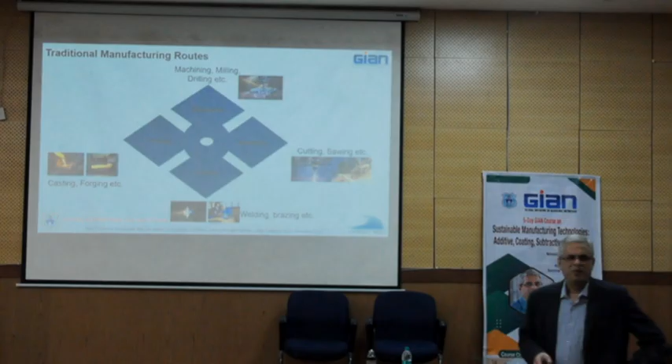Separating it from a larger body like cutting, sawing, there's casting and forging, welding, brazing. All of these are important. Yeah, I want to make that point. It's not as though now AM will start and all of these will go for a toss. No. So, but these are traditional techniques. They will be there always. AM seeks to replace some of them, some of the times, right? That's important.

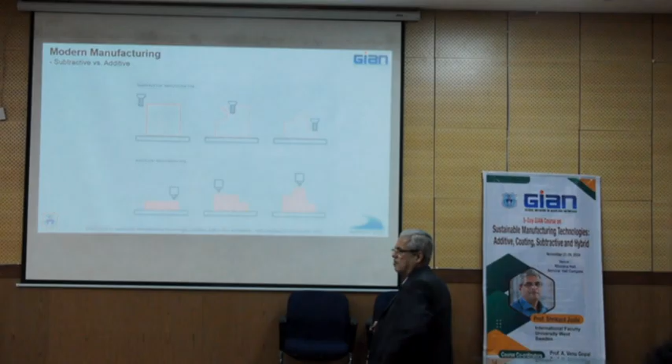I don't think we need to go into this. All the subtractive techniques, for example, are top down. You start with a huge chunk of material, and then from that you machine out in an elegant way as well as you can the kind of part that you want, right? Additive, on the other hand, everything you have heard of, layer by layer, bottom up, right? So you kind of use what you need. You don't create junk alongside that. Simple way of doing that, right?

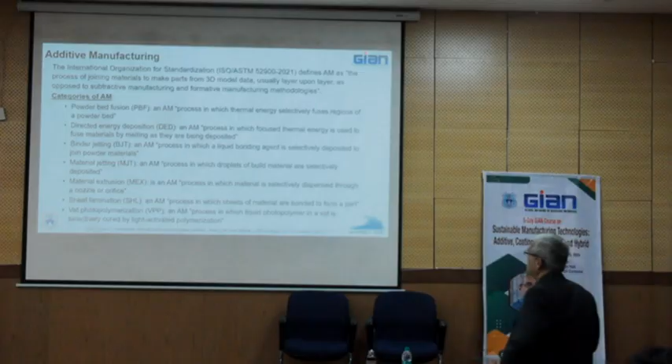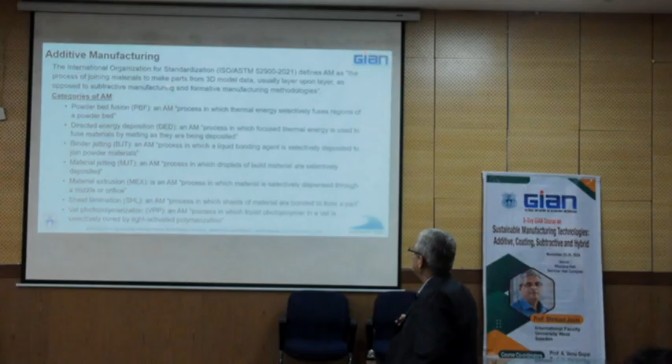Let's see. I always like to see the definition. How do people define AM, right? So if you look at the International Organization for Standardization, they define AM as follows: the process of joining materials to make parts from 3D model data, usually layer by layer, as opposed to subtractive manufacturing and other formative manufacturing technologies. You have many categories of AM today.

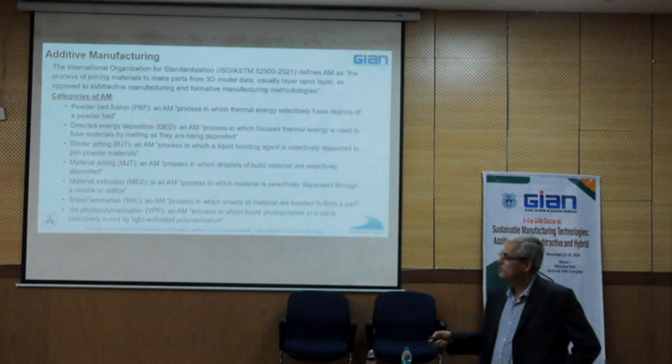If you start Googling, you'll see all sorts of stuff come up, which somehow fulfills at least some parts of this definition, right? Powder bed fusion, all of us tend to accept that. Directed energy deposition, and I intentionally sequenced it in this manner. Binder jetting, material jetting, little less used. Material extrusion. Honestly, I didn't know that this is classified as AM. I didn't know that, but apparently it is.

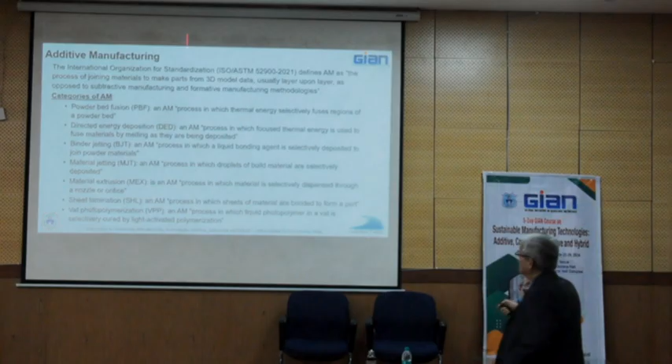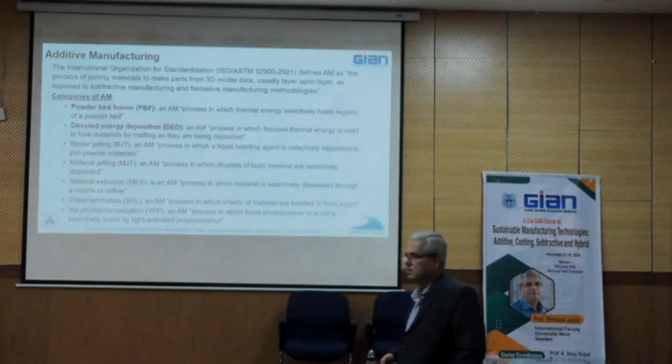Sheet lamination, what the hell? You stack these sheets together layer by layer, so it is AM. No, I don't agree, but I must tell you what is out there, right? Vat photopolymerization, this goes into a regime which I said I will of course not cover. But be that as it may, for me, what is relevant the most from a metal additive manufacturing standpoint are these two: powder bed fusion and directed energy deposition. So we will spend most of our time talking about these two. And if something else is interesting for whatever reason, we will take it over lunch, tea, or at the guest house.

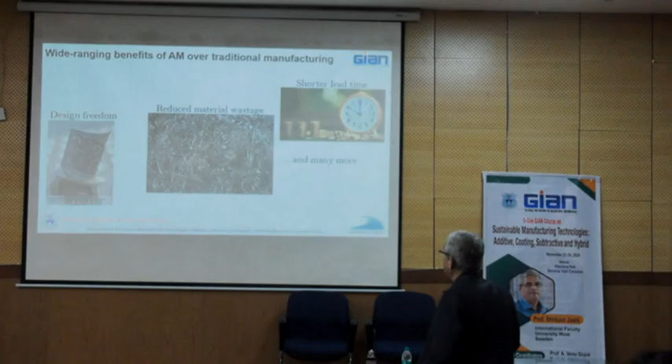Guys who are wedded to AM always like to talk about this: wide-ranging benefits over traditional manufacturing, design freedom, reduced material wastage, shorter lead time. The reason I decided to pick these three and not go through a long list about sustainability, this and that, is because I believe in these three. Whether it is sustainable or not is a different issue, but these three are always true. There is no ambiguity that if you do something by AM, it gives you immense design freedom, which therefore leads to lightweighting and things like that. There's no two ways about that.

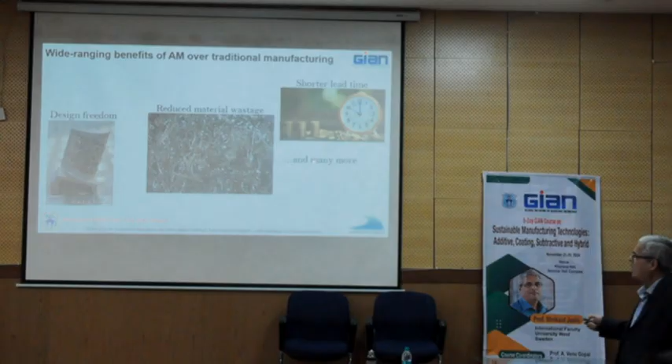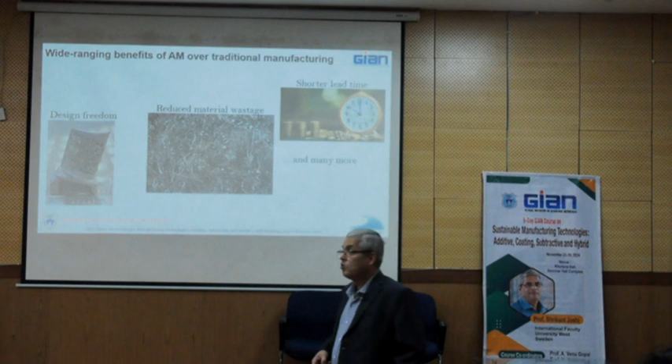If you do something bottom up rather than top down, via machining, drilling, all that stuff, you don't produce this kind of wastage or scrap, right? No confusion about that either. And therefore it leads to shorter time. And any of the advantages that are directly related to these three, I agree with. I will stay away from sustainability because I relate that to design specificity. But otherwise, if you say, okay, I can print just in time, of course. I can make patient-specific implants, right?

I have a Swedish colleague who is 7 feet, and I have a friend from my BTech days who's struggling to reach 5 feet. They want different hip joints or dental implants. You can make patient-specific implants, right? All of those benefits are pretty clear. So no point in arguing about that, right?

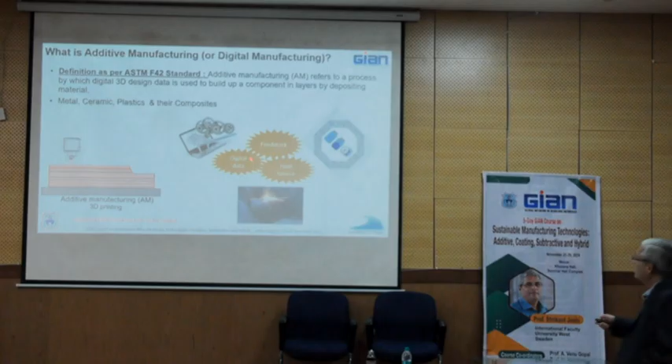You use all the tools at your disposal to make it happen, right? So you have design data. This is something going on the side, but you rely on digital data. You rely on good quality feedstock, and you rely on an appropriate heat source to make metal AM happen, right? Now, we will at different points of time talk about all of these three during the course of this talk. Feedstock will be part of a different lecture perhaps, but you harness the benefits from all of these three to be able to do crazy stuff like that, in a very convenient way.

In terms of size and complexity, what can you do, what can you not do? I think that is controlled partly by your imagination and partly by your designing skills. That is what limits it. Otherwise, you can do just about anything.

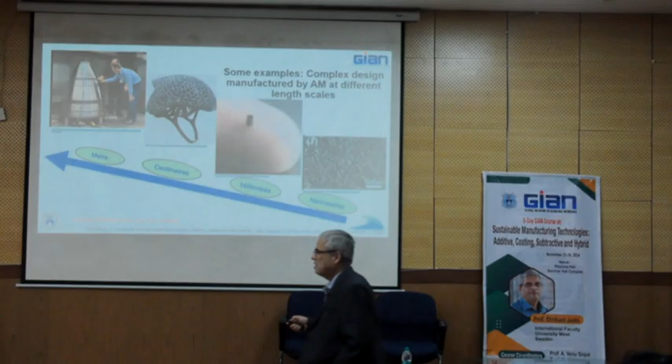This is something that NASA does, but right in the same building where I have my office, GKN Aerospace makes similar looking parts which are taller than this guy, by DED wire, right there, and they fly.

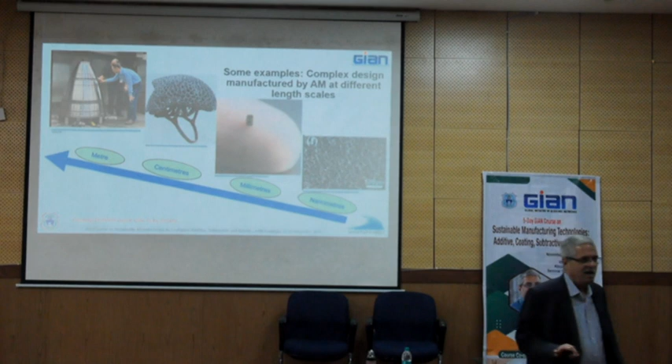So just like some people may try to sell you that if you use AM, you're sustainable. That's wrong. There are other guys who will tell you that AM is all hype, not reality. Even that is not reality. And as educated people, our job is to filter what this group is saying, filter what that group is saying, and zero in on reality.

So the reality is somewhere in between. Yes, usually it is sustainable. It's not hype, it's real. But in some cases, it may be meaningless to look at AM as an alternative production route. And it is also important to note that all of these are realizable using appropriate tools. So you can do many fun things at different length scales.

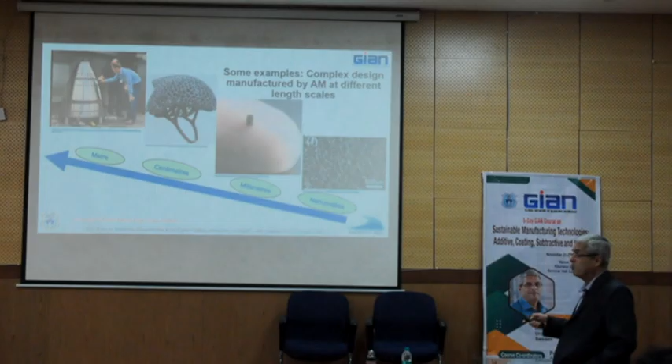That's important, because I've heard people say AM is okay only for small parts. Small parts because you're looking at PBF. Maybe you have a 9-inch by 9-inch or 6-inch by 6-inch build volume and say, okay, we will do only small parts. No, these are real, they fly, so no problem.

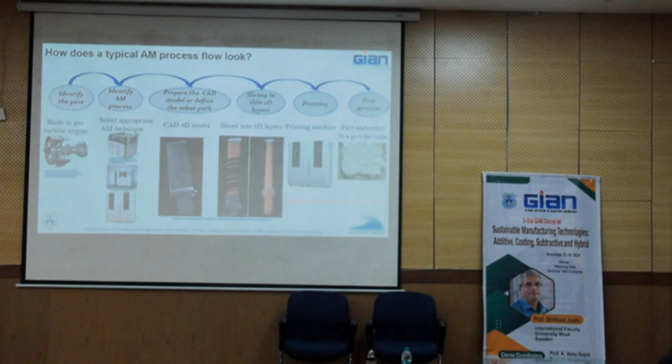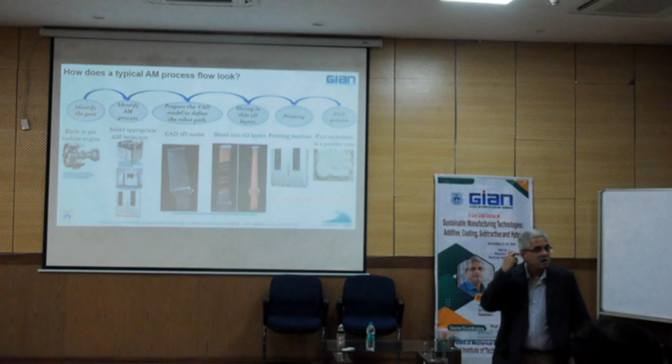So what does a typical AM process flow look like? I'm being a little generic here, but identify the part, and decide if that part is appropriate to be AM built, first of all. If it is appropriate, you identify the AM process. It could be one of several that we will talk about. Prepare a CAD file for that, do layer by layer slicing so that you know how to print, then actually print and post-process.

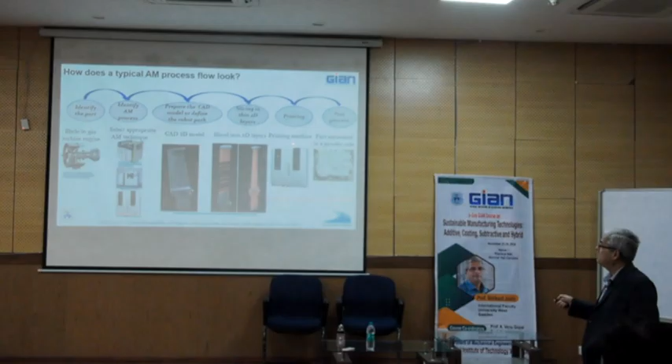So we are going to talk about several aspects of this in different modules of this course. Incidentally, I took some of these slides from my postdoc, Ashish, very smart guy. He's in Finland right now. So we'll talk about most of these things. At the moment, this module and the next one, we will focus more on the printing part.

So what concepts do you need to know to exploit AM? You need to know about the raw material. What quality of powders do you need to use? What quality of wire do you need to use? In some cases, it could be liquid, but we will not talk about that. But powders and wires especially.

You need to better understand how melting and solidification takes place. In some cases, and we are not going to talk about that either, you want to see if you can take some signals during melting and solidification, learn from those signals and do some sort of a feedback loop to be able to control how you print. That is crucial. Sometimes, depending upon the application, you want some mechanical post-treatment.

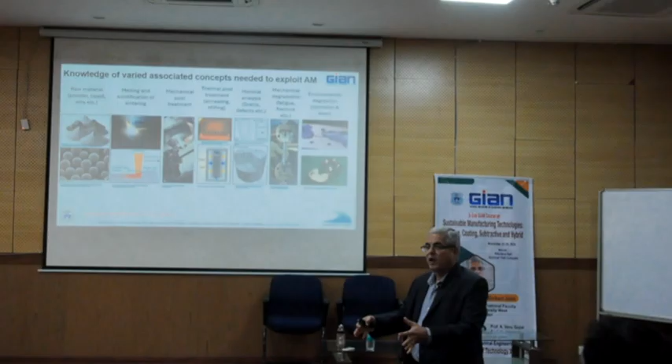I'm going to differentiate this a little bit from post-treatment that is inevitable to make the part, depending upon what process you use, but something that you need once the part is out to actually deploy it in real use. So it could be mechanical in some cases. In some cases, it could be thermal. And we will talk a lot about this part.

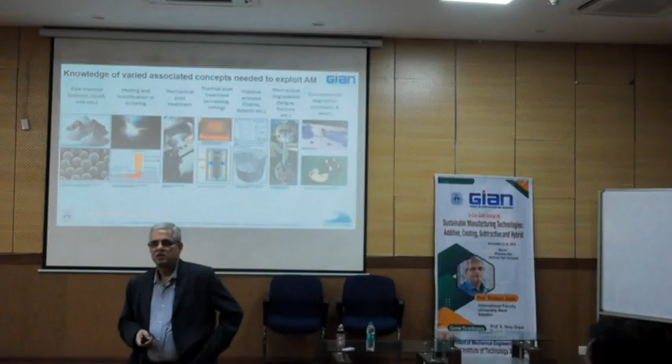You also need to understand characterization of these parts. I don't know how many of you come from a metallurgy background. How many of you have seen the structure of an AM part? If you can raise your hands. Have any of you had a chance to see the structure of an AM part? You two, but that's rare. Anyone else? Three? Yeah, but very few. Most of you others have not.

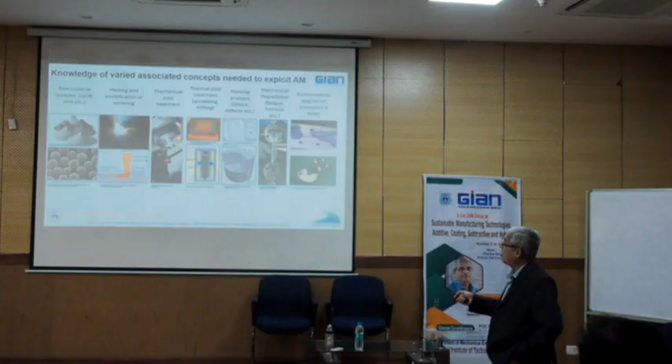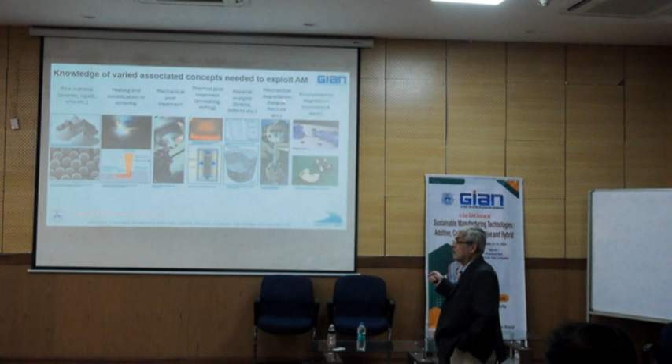So it's important for you to be aware of how the process or the process parameters you adopt influence the structure of the built part. For some of you, it may just be curiosity. For others, it may be very important because, believe it or not, this eventually reflects what mechanical properties the part will have. I see Dr. Manjaya nodding, so probably he does a lot of that in his research.

And then after all this, you need to see whether what you have built can sustain a real application for a long time. If it cannot, does it need to be surface engineered in some manner? So if you want to fully exploit AM, you need to have a fairly decent understanding of all of these things.

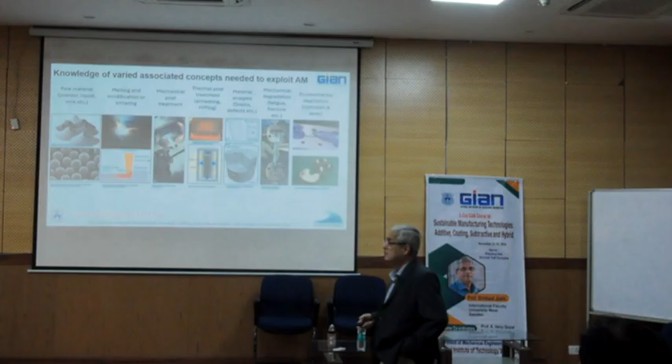Sometimes you may not, but someone else in your team might have, or you may collaborate, but the important thing is all these things are crucial, right? And I spoke about structure, the metallic structure of this. That was just one example. Someone like Dr. Manjaya is necessary with good background in materials engineering. I think the 2-3 hands that went up also are in some way associated with materials engineering.

So different parts of this cycle require different kinds of expertise, right? Data science, design, robotics and automation. You need knowledge of all of these, right? Does anyone want to argue about this, that it is interdisciplinary or whatever?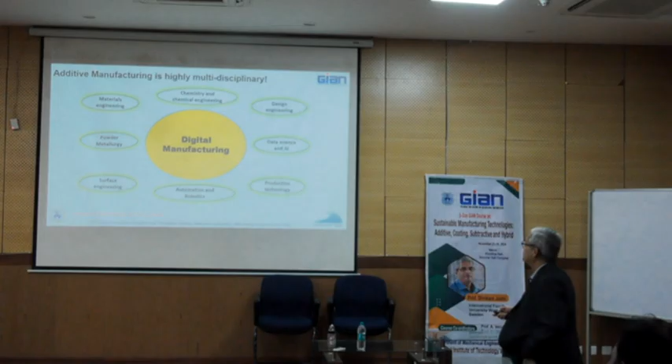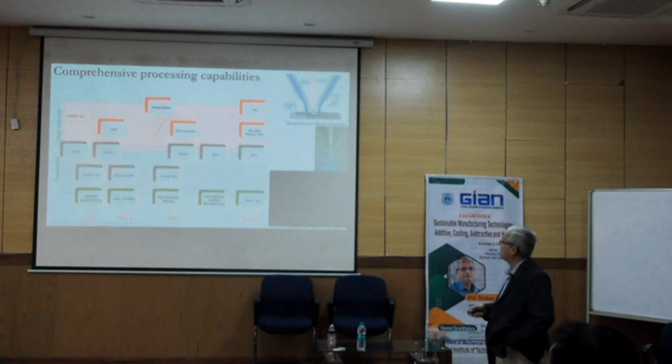Let's look a little bit at what the canvas of additive manufacturing technologies looks like, right? So there are essentially 2 broad categories, one associated with energy beams. One could be laser, one could be electron beam. The other, of course, is arc. People used to call it a poor cousin of the energy beam technologies, but I don't think so.

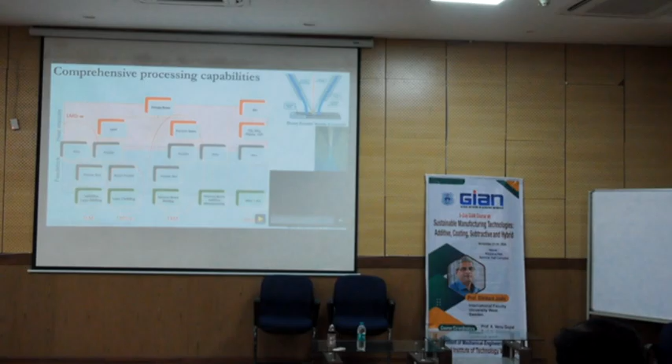Fairly proficient in, let me see if I can, this is incidentally what I'm showing you here is everything that we have in... did it start or did... but doesn't matter, it's not important.

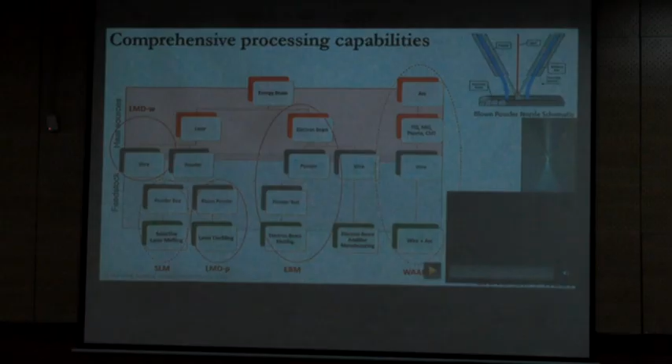Yeah, but what I wanted to show while that video is going on the side is we at our university have access to all of these things that I encircle here, right? We have an electron beam equipment from GE Additive. Earlier it used to be known as Arcam. It still remains one of the very few companies that makes electron beam powder bed fusion equipment. We recently have procured a powder bed laser equipment from Aconity. It has a fairly good size build volume.

We have also been working for the longest time, even before it was fashionable to call it additive manufacturing, for almost 20 years now, with direct energy deposition using wire. And this big part that I have mentioned, made by GKN Aerospace, is an outcome of some of the low TRL work that we did with direct energy deposition using wire. So we touch all of these bases.

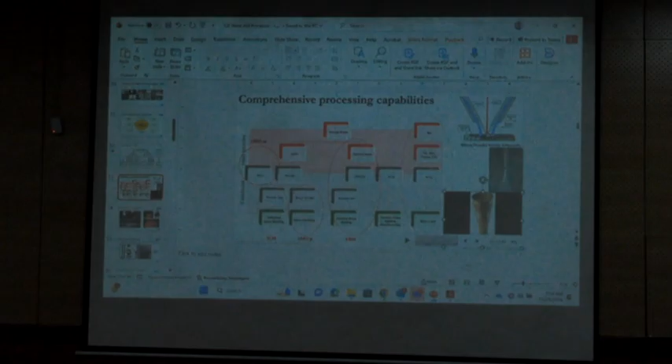More recently, we have been beginning to pay more and more attention to WAAM also. It's not as useless as people want you to believe. It's cheap, but it's very useful. And we have begun to use it to make, at least in a preliminary way, many gas turbine parts and things like that.

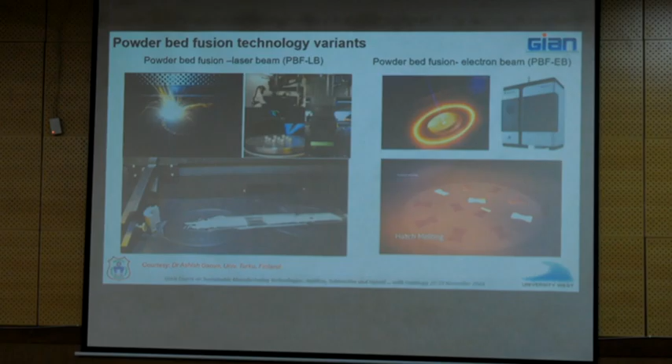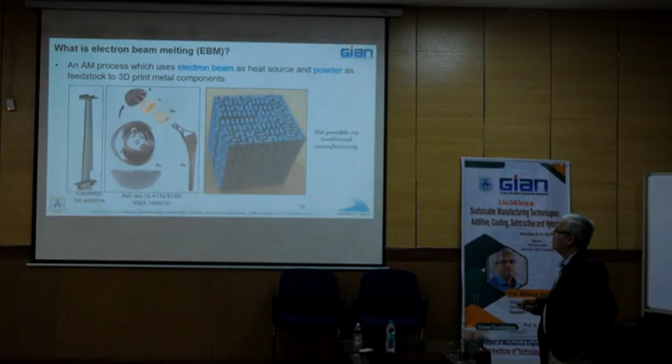Have any of you seen an EBM machine anytime, anywhere? There are very few in India. There are more SLM machines, I think, in India than EBM machines. I will try and run you through how this works a little bit. So if you look at an electron beam machine, as the name suggests, it uses an electron beam as an energy source, right? And powder as feedstock in most cases, to 3D print any metal component.

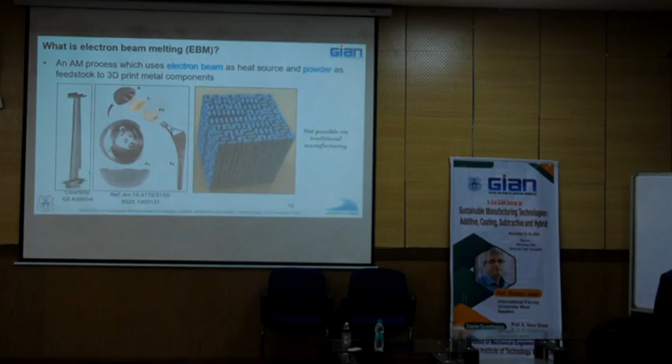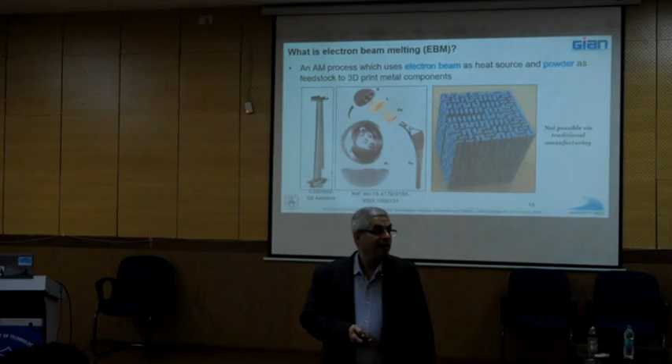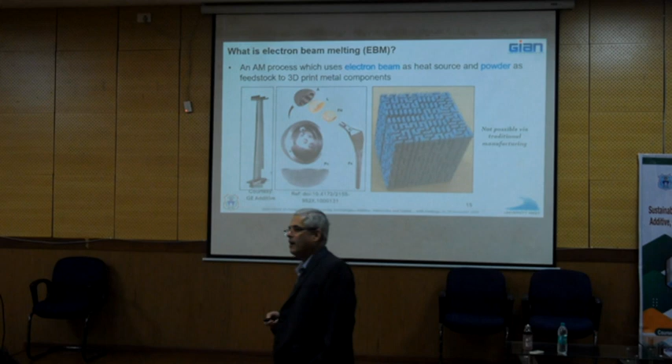So, next step, that's correct. So you use the powder, you make it in the form of a bed, and you use the electron beam to locally fuse in regions of interest. Those regions of interest being dictated by what your 2D slice looks like, right? So that's simple. So let's talk about some of the hardware issues.

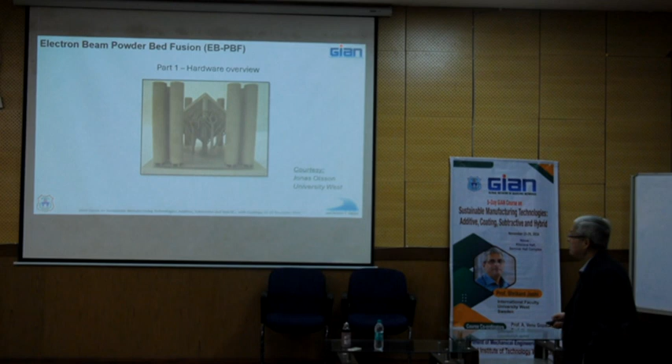I actually had a full video of the Arcam equipment we have, but I couldn't accommodate it. So this is what it looks like. It's somewhat a lab type equipment for EBM. It has two essential parts. It has this electron beam column, just like you would have in an SEM, for example, if you have seen a scanning electron microscope, in a very loose sense, something like that.

You have a processing chamber which has twin powder hoppers where you feed the powder that you will utilize to make the component. The hardware has several other crucial components.

It has a rake. What's a rake? It will take the powder from the hopper and form a bed with that. It will spread the powder. So that's a rake, right?

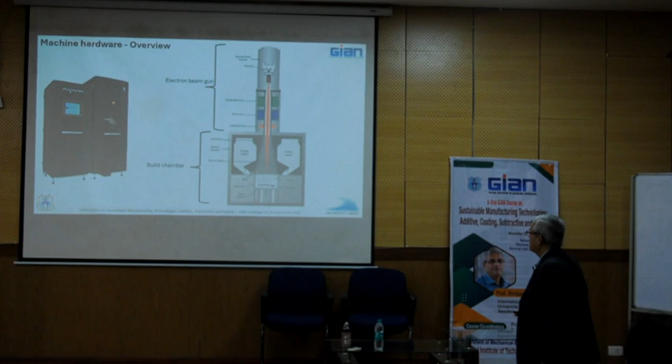And then the electron beam will locally fuse the powder, and the rest of the powder will remain unsintered, not go away. Then at this stage, you start with what is called a build plate.

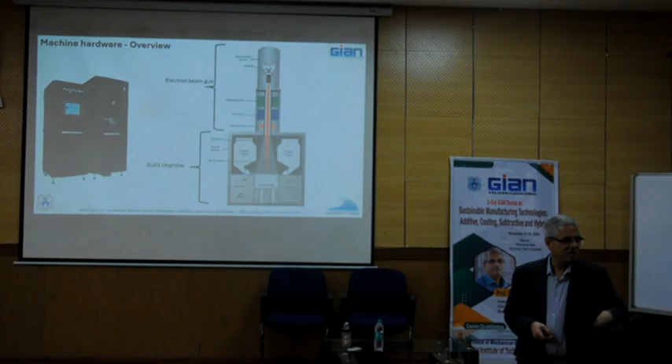This will advance depending upon what your layer thickness is. Again, a new bed of powder will be raked, and again you will locally fuse it. Now what you fuse would be a little bit different compared to the earlier layer, because again it will be governed by the slice data. That's how it proceeds until you have built the part that you have designed to build.

So, just what I said: a thin layer of powder distributed and welded, every layer. Part size is limited, as I was saying, to whatever your equipment allows you to handle. You can't build the kind of cone that I showed right now in such a chamber.

Eventually, whenever you stop, the whole build volume will be filled with powder, with the component kind of embedded inside, where it was sintered, or fused, by the beam.

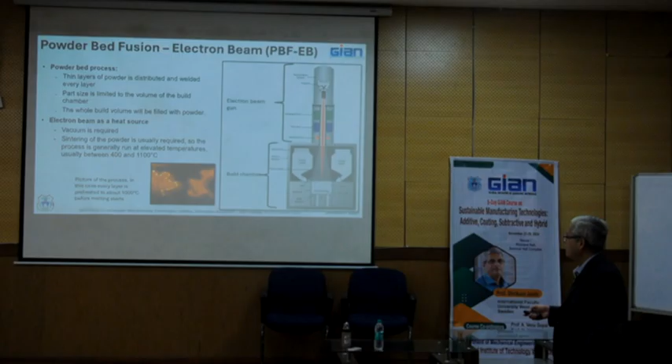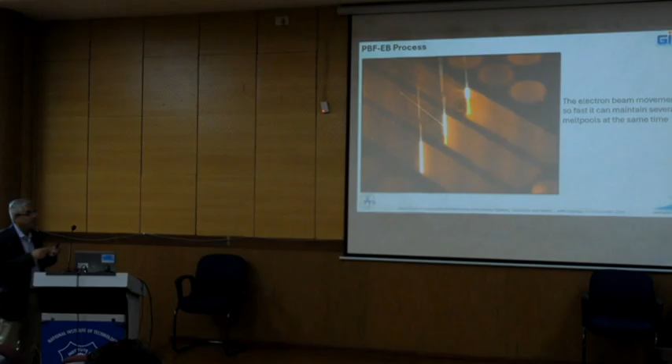I have some videos, I don't think they do justice to what actually happens, but it's a very interesting process to look at. One nice thing is the electron beam moves so quickly that you can simultaneously maintain several melt pools at a given time. If you don't believe me, I hope there is some video that will show you that. It's so quick that there is something molten here, here, here at the same time, because it moves so quickly. That is extremely fascinating.

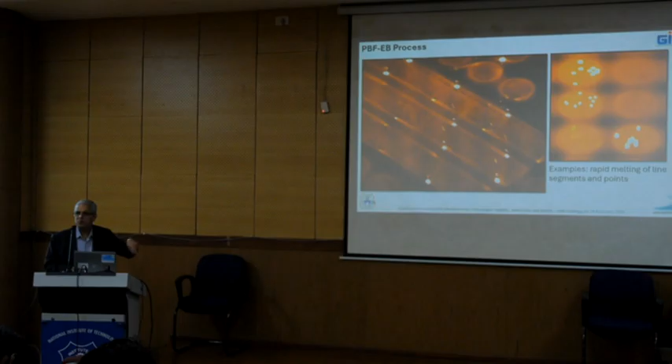Here is an example where you have a rapidly melting line at different segments at a given time. That works very well. And how do you move this point? That determines structure. On the face of it, it's very simple, but at another level it needs significant knowledge of what will happen depending upon how you jump these little beams around.

Eventually, once the process is done, the sintered powder with the build parts will look something like this. Looks like crap actually, it looks very bad. But once you take the unsintered powder out, once you have removed that, then you have whatever you want.

This may look like a very unimaginative build, not terribly exciting, but as an academic, this is very exciting. Why is it exciting to do something like this? For various reasons — we are trying to build here blocks.

So we are looking at different build strategies. This may be built with the electron beam dancing around in a certain way, this could be built with it dancing around in some other way. The size is such that we can, for example, do tensile test specimens, or fatigue, or creep. We can fabricate them in this direction, or we can fabricate them in this direction.

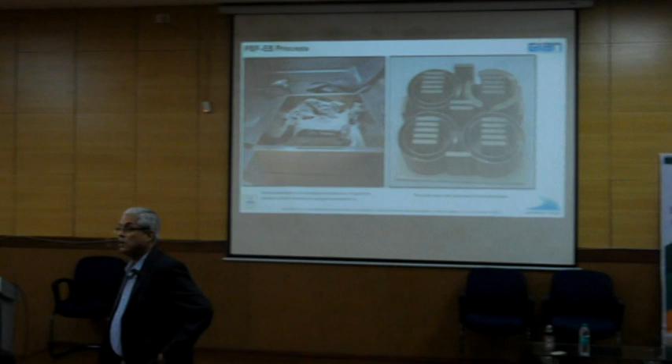Strength. Yeah, I'll make tensile specimens to measure tensile strength, but that's not the answer I'm looking for.

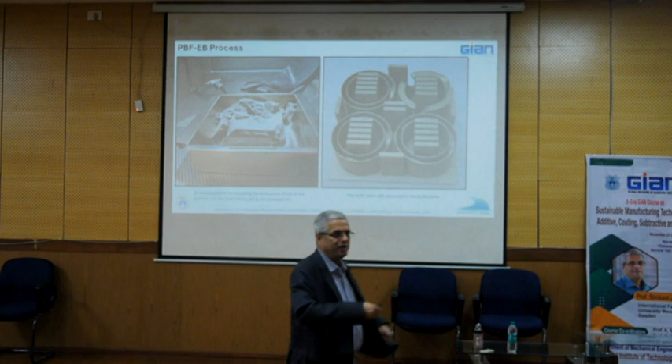Loaded direction, correct — so go one step further, then you get 100 out of 100. Anisotropy, correct. I'm interested in seeing if the mechanical properties are the same in the build direction and the direction transverse to it, because many of these, at least reportedly, tend to be very anisotropic in properties.

And then I also want to look at what happens if my wall thickness is thin or thick. So this kind of build allows me to do many things — this is what we call a bread and butter build. If you make one build like that, it's one PhD and a little bit of a postdoc. One build like that keeps us busy for a long, long time.

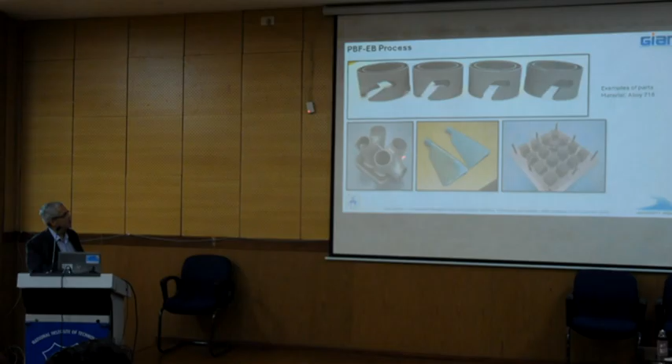And then, of course, it need not be like this. It could be more complex, and you can build just about anything. So that's important.

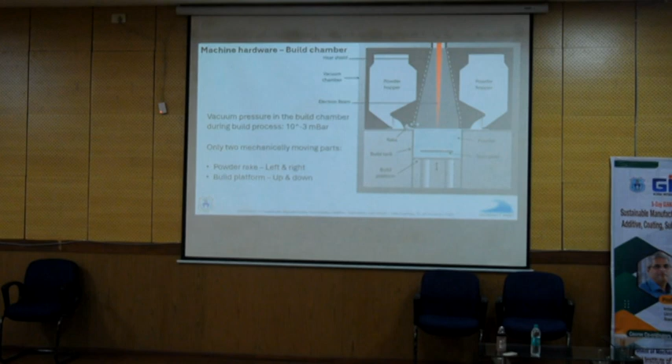Let's look at some other things. There's a heat shield here for preheating. This is done under vacuum, roughly 10 to the minus 3 millibar level. The nice thing is there are only two moving parts: one is the rake that sweeps the powder, the other is the bottom platform that goes up and down, mostly up, depending upon what layer thickness you have.

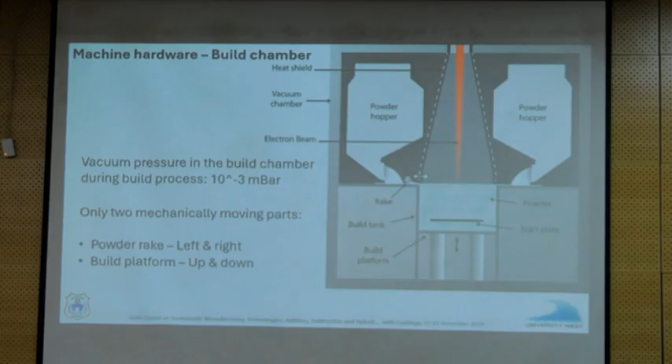The purpose of the rake is to apply a thin powder layer. That is a process variable - how thin do I make it? 30 microns, 50 microns, 60 microns? That's something I can vary, and it's one of the process variables people usually investigate. Your Z direction up and down motion will be dictated by what powder layer thickness you choose to employ during your build.

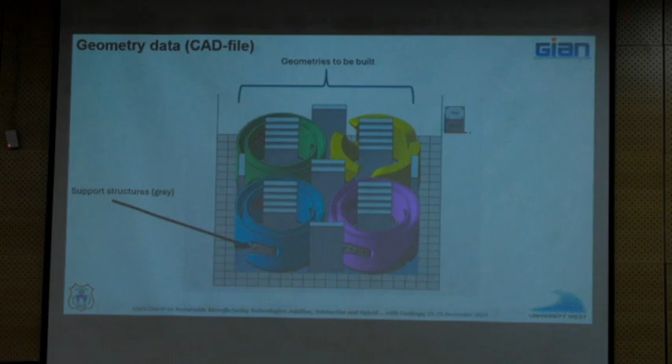Let's talk a little bit about the process, and hopefully there are some videos that fascinate you. You always have a support structure on which you start building, and eventually you need to take it off - remove the support structure. Your geometries could be as complex as possible; there is usually no constraint, but they have to be within the build plate that your chamber can accommodate. That's the main thing really.

The typical layer thickness that we have used in most of our work has been between 50 to 90 microns. Sometimes that is also dictated by your powder particle size, but that's a complicated interrelationship. We have kind of changed it over this interval, and that works quite well.

If you have to define the steps involved in processing: it starts in powder bed fusion with application of a layer by a rake with whatever thickness you choose. Then you use an appropriate power for your electron beam - something that can be varied about 3 kilowatts at fairly large speed. We can vary the spot size as well. There is a certain focus spot size for the electron beam, but you can defocus if you choose to build it with the gun a bit further away from the focal distance - then you get a defocus spot. Sometimes you may want to do that for certain applications, and then you program it to scan. The scan strategy is important in how you make the beam jump.

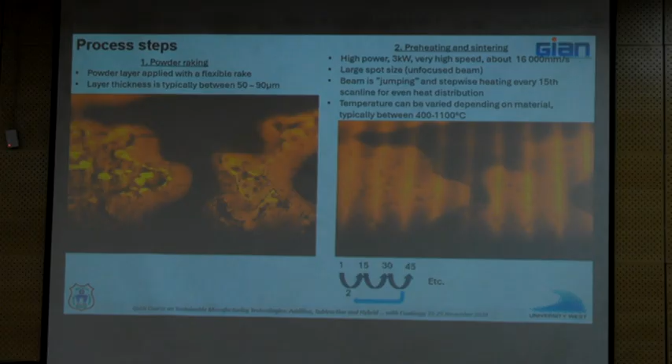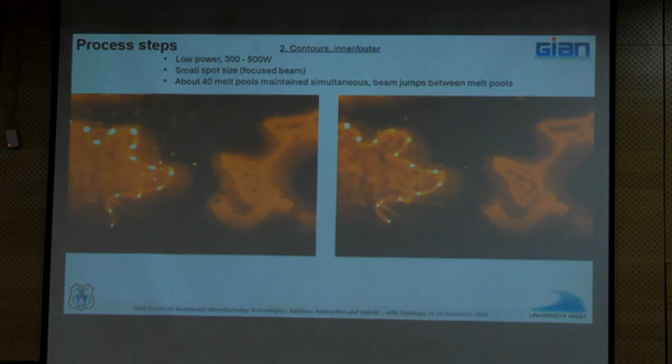Depending upon what material you are depositing, you govern the temperature as well. Our experience with our equipment has been that you can maintain up to 40 melt pools at a given time - the beam is jumping, but what is melted is not yet fully solidified. That's what it means. It doesn't mean 40 beams, it is 40 live melt pools, which gives you some indication of how fast the thing can move.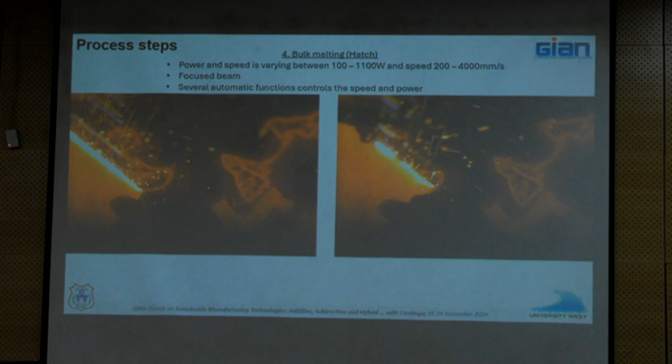These are basically research interests - what is the influence of power, what is the influence of scan speed, do we do it in focus or non-focus - but just talking here about the capability of the beam.

Now Dr. Manje has shown me the trick of how to make my videos work. So this is powder raking now.

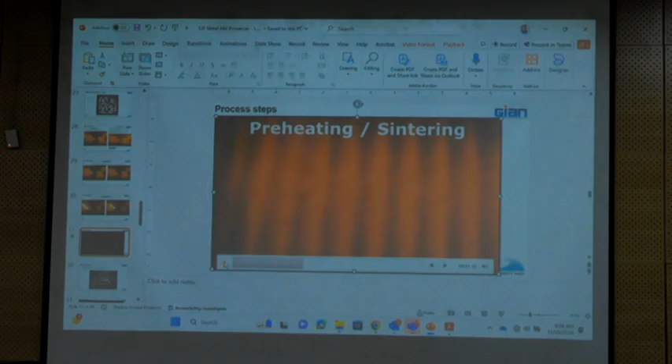Then a little bit of preheating and sintering using a laser beam, and then we do a contour. We'll stop there and see if you understand what contour means. So we preheat to sinter the powder, then we do contour melting, and then we do hatch melting after that - very fascinating to see.

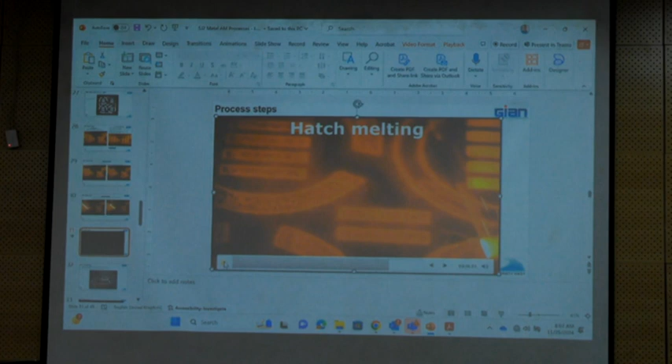So many electron beam spots - this is still all contour melting, and then we do hatch melting, right, so that is hatch melting. Usually the parameters for melting the contour are different from parameters for melting the hatch. A contour is not always necessary.

Just going by English language, what is contour? Yeah, please.

No, it's actually taken by a camera - it's real, no digital. Digital image correlation - for what? When a tensile test is happening, how much strain hardening are we capturing using a live camera like that we have done? Yeah, so this is just a live camera. Does that answer your question? I'm not clear about your question. Meaning, what kind of camera do we have?

I will have to get you those specifications. I don't know off the top of my head what camera it is, but it's an IR camera - a pretty fancy camera as well. If you want more details, you have my email, write to me and I'll get you those details.

Coming back to my question, what do you understand by contour? Exactly, right? So it's not mandatory, but we usually like to do the outer periphery of the part first, and then do everything inside that boundary, which is called the hatch. Usually the parameters we deploy are different for the contour and for the hatch, but we see that works quite well.

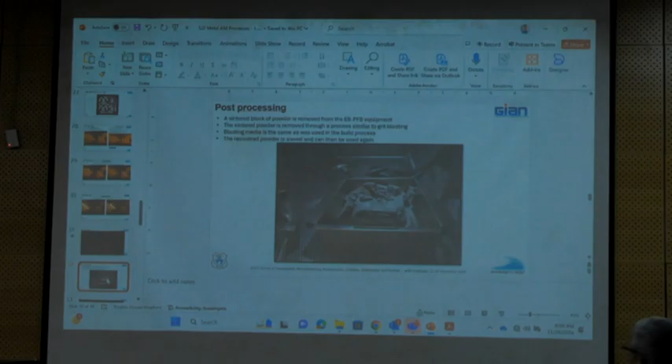Embedded in this powder bed is a sintered part, right? The sintered powder is subsequently removed by grit blasting. The rest of the powder, it can be recycled, right?

We will come to that in a minute about recycling of the powder. Yes, please.

It depends a little bit. Again, that too is a parameter of control. But you're right, it is not required every single time because the bed is already hot. The bed is already hot, and depending upon what you're building, if we do Inconel, sometimes the bed stays at 1000 degrees for the entire duration of the build. So it is pretty hot, and that's a good point though.

So we don't always use it. You can use it if you want. As with everything else, it's a parameter that you can play with. Bed is heated. It's a bit up to you, one of the parameters you can choose to heat or choose not to heat, depending upon at what temperature you are maintaining the build and whether or not you think preheating is necessary and helpful.

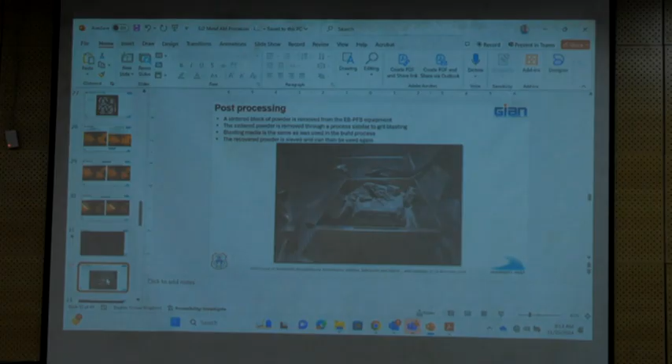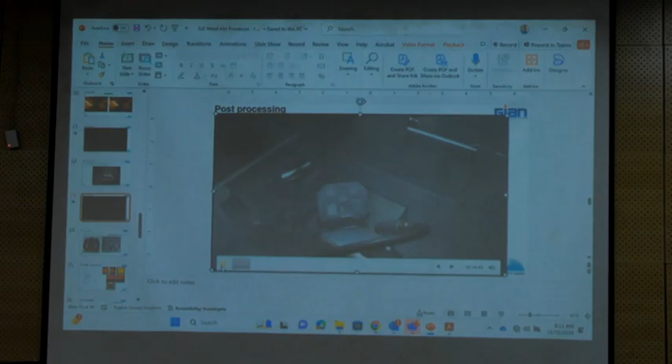So if you just finish printing, what you see is very unattractive. It looks pretty horrible. But it's not so difficult. You then just use a grit blasting machine. Take the rest of the unsintered powder or loosely sintered powder off.

What we do many times is use the same powder for blasting as we are using for the build, so that there is no contamination. So we do that sometimes, right? This is exactly what you had seen earlier, but if you saw it right after building, it looks horrible, right? So, what are your thoughts on what happens to the rest of the powder?

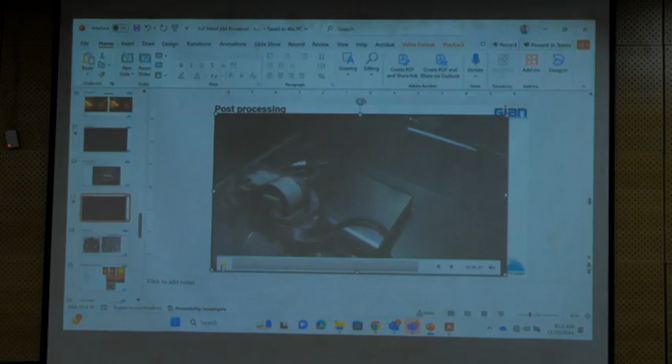Reused forever? How long? 2 or 3 times. Why not a 4th time? Overheating melts the powder, okay. But then you can't use it even a second time, if you're saying it forms a solid piece, you can't.

For any question you ask me, I'll say it depends. And you're usually right, 90% of the time you're right. So in this case also you are right, it depends. But jokes apart, some of the powder can fuse together a little bit, so it could be coarser. So depending upon who is using this, some people choose to sieve it and remove the coarse, aggregated particles, because otherwise it's not good for the properties of the build.

The other disadvantage over time is something I am looking for you to answer. So, I sieve every time, right, so I get the same powder particle size every time. Yeah, there's a little bit of oxidation. Every time you use the powder, there's a little bit of oxidation. Again, it depends upon what powder, but there is a little bit of oxidation.

You also made a good point. If you are holding the bed at temperature for a long time, depending upon how complex or how big the build is, then this powder is being heated for the same duration of time, so that has problems as well. Apart from oxidation, it depends on the chemistry of the material, but you could begin to see some precipitation, like carbides and all. So a lot of things happen.

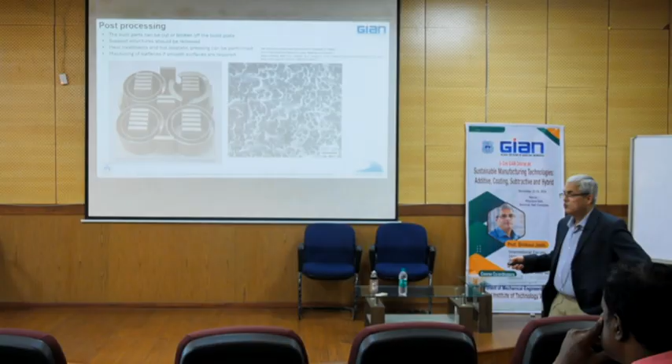I'm honestly not going to talk about post processing so much here, in the sense that I will cover that in the other module. But here by post processing, I largely mean how do you remove it from the base plate. So to that extent, post processing.

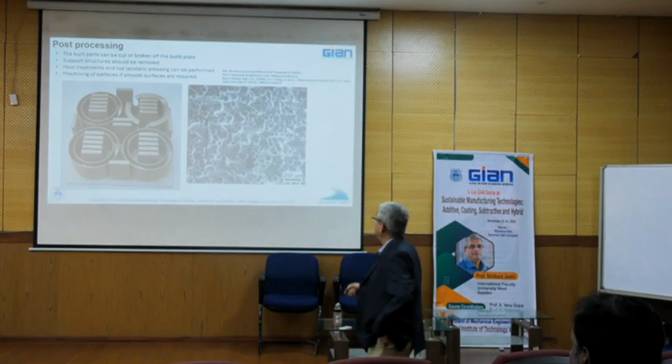Depending upon how you have built the initial layers, you can just yank it off from the base plate. Many times you have to actually cut. If you are doing nickel-based superalloys, we many times EDM wire cut from the base plate and remove whatever support structures there are. These other two parts will be part of the other module that we will talk about.

We spoke about the structure of the part a little while ago. The surface would look something like this, depending upon how you have built that. I'm not suggesting this is the best or worst surface morphology, but it could look a little bit like that, where you see islands which are fully molten, and some that are not, but will melt the first time you do the next one.

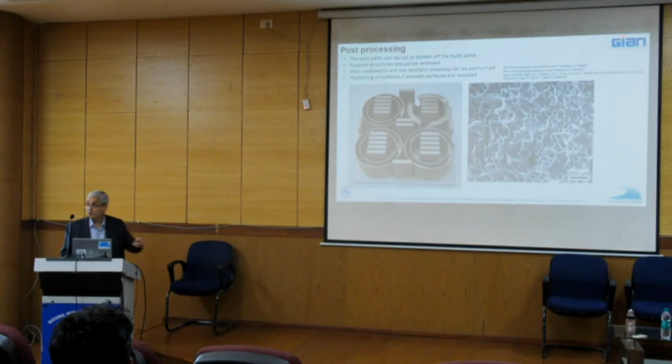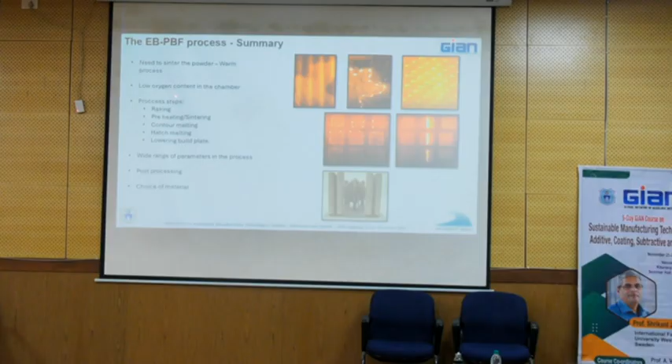So if you have to summarize, EBM is slightly a hotter process compared to SLM. It has low oxygen content in the chamber. The prominent steps are raking, preheating or sintering, contour, hatch, and then lower the build plate and blast it off.

You even do CM247 and then a Hastelloy, and then suddenly someone says, let's do a bit of steel SS316 - that's very hard, right? Because you need to clean the whole chamber, and when working with gas turbines especially, they don't like us to touch other materials. So if we start with Inconel, we stay with Inconel for a long time. If we move to Ti-64 or something, we stay with that for a long time.

But that is a style in which our group works. It's not a limitation of the equipment. That's important to know, because if you scan the literature, you will see just about everything done by EBM. So there's nothing limiting. People have also done tungsten now.

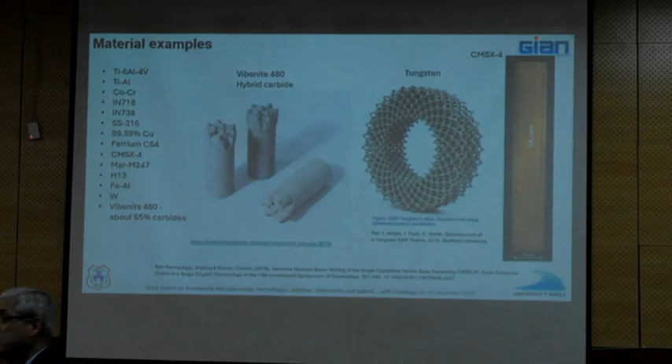Just like the Aconity machine that I will talk about for SLM, even for EBM there are now some experimental small systems ideal for academia coming up, where you don't need so much powder. It's easy to move from one material to another. There's a company called Freemelt in Sweden - they are essentially guys who were with Arcam, or now GE Additive, earlier, but they broke off and started that. If you're thinking of buying, it could be something to consider. You don't need so much. Freemelt - that's the name of the company.

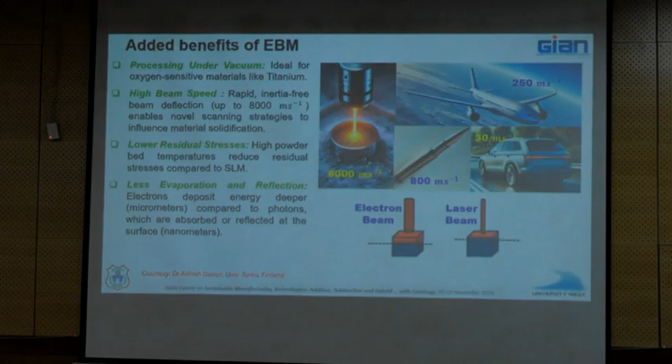Maybe because there's not so much work done on that. Again, people should see value in it. I don't think it's a fact that you can't do it, but you raise a good point. I have also not seen so much work on aluminium. I see some in SLM because that's a colder process. So maybe by and large people still prefer SLM. I don't know, but we bought our EBM first, so we worked a lot on EBM. But there are far more laser powder bed fusion installations worldwide, many more than EBM. But coming back to your question, I don't believe there is a limitation, but I'm not so sure.

The electron beam in this case, no, it won't - essentially because the heat input is localized, and that's true for a laser as well. The heat input is very localized. So maybe I have that cartoon when I talk about SLM. If you're talking about location, it jumps 1, 15, 30, 45, then comes back and does 2, 16, 31 - so they are not doing adjacent spots. So if you do it at one spot, the rest of it kind of serves as a heat sink in the vicinity of that. And in any case, you don't care if it heats up.